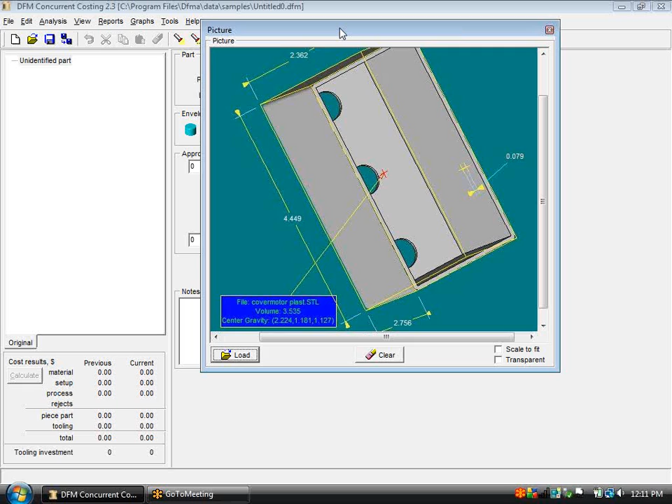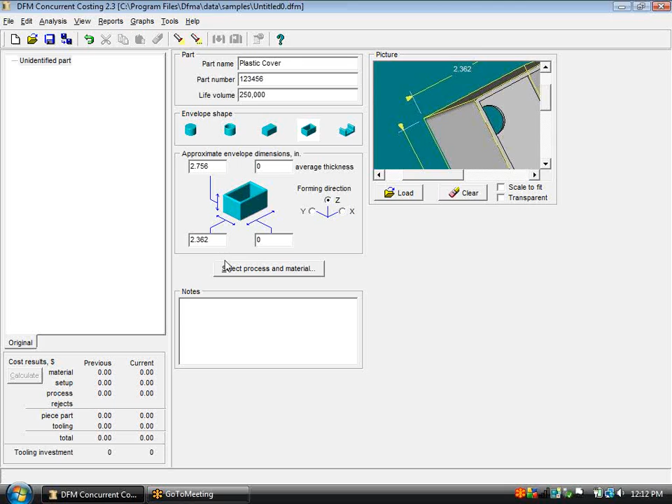So given this as the example here, I would call it the plastic cover. I'd give it a part number, and I can specify a life volume. Maybe we want to mold 250,000 of these parts. Now it's obviously the hollow box shaped part. It's 2.756 inches tall. It is 2.362 inches wide, and it's 4.449 inches long, with a section thickness, a wall thickness on average of 0.079.

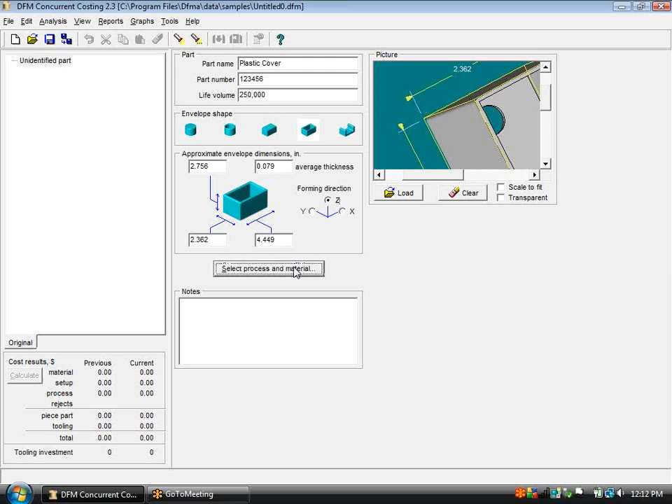Now Z is the appropriate choice for the direction of tool motion. I would open and close the mold in that direction, therefore getting those holes in the bottom of the part, not requiring any side actions on the tool. Now I press this button that says Select a Process and a Material to bring up the Process Material Selection dialog box, where I'm now going to choose the manufacturing process and material.

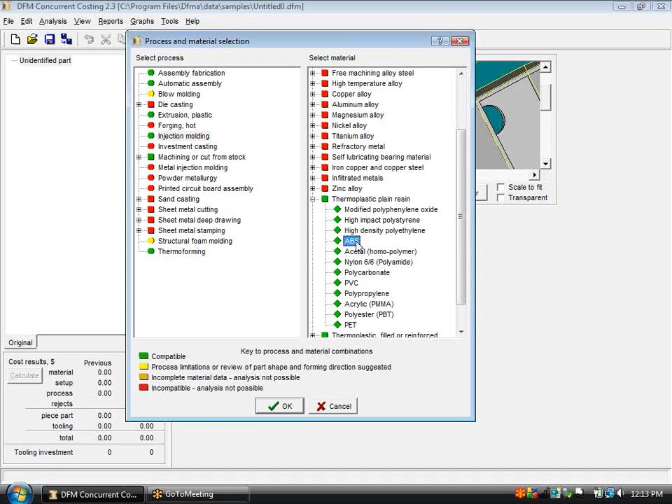So here I'm going to pick injection molding, and you'll see the materials turn red and green to indicate to me which materials are and are not appropriate for the manufacture of this part using this process. So under plain resins here, I'm going to pick ABS as the material I want to use. So when I've selected a process and a material and they're both green, or they're yellow and I'm willing to accept the process limitation that is being described to me, I say OK.

And the software will go ahead and calculate for me a cost, 29 cents at the piece part level, with $33,348 for the tooling. Now that calculation of the cost at this point is based on a guess of what these values are based on the envelope dimensions and the envelope shape that we specified. And it's up to us now to go through and refine these inputs to better calculate what the actual cost of the part would be. Now I can change anything I want, and I can click Calculate to see the impact of that.

So right away, let's change the batch size here to 12,000 pieces. The default batch size is set to 1/8 of the life volume, so that's where that number came from. If I change that, it colors the field blue, and when I click Calculate, I can see that that really had no influence in cost at 2 decimal places of precision. It actually took my setup cost from something less than a penny up to a penny as a result of that change. I could change the plant efficiency, the regrind, the scrap value, any of those values.

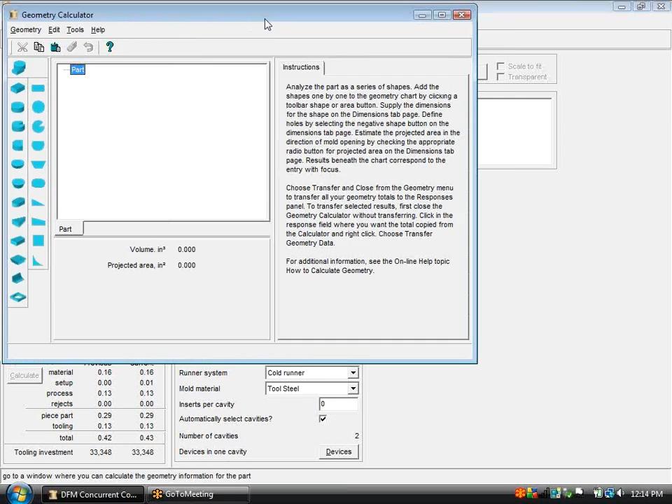And then I get to these geometry inputs. Now, if I know them, I can type them in. So if I know this part weighs 0.15 pounds, I could type that in there. If I had, again, imported the CAD model, these values would have been extracted from the model for me. Or in this case, I'm going to show you how to use the geometry calculator to go about building up the geometry of that part. Well, we're starting fresh here.

The envelope dimensions that we entered at the top level are not assumed to be the default when we start. So I got to start with a block, and I want to pick this yellow box here and tell it it's got a 0.079 wall. It was 2.756 tall, it was 2.362 wide, and it was 4.449 long.

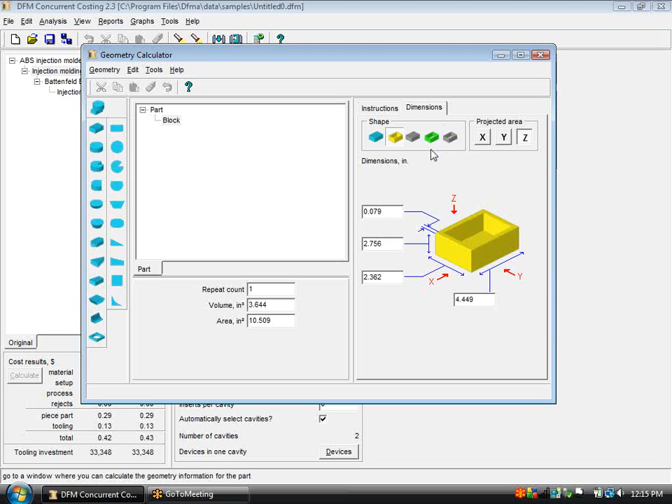The projected area direction is in the Z direction here, so that's going to be influential in the calculation of the machine size. And then to get the volume correct, I had those 3 holes in the bottom, so I'm going to pick a cylinder here, tell it that it's negative, it's 0.079, and those holes are about a ½ inch in diameter. Again, the projected area is in the Z direction, which is going to subtract from the amount of press force that's required. And there are 3 of those that are in the bottom of the part.

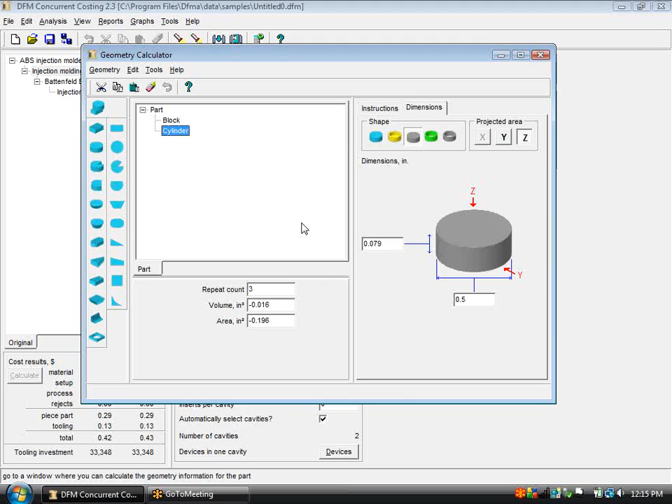Now if I pick the part level here, you can see the volume and projected area that the software has calculated. And if my shape was more complex, I would use these other shape classes here to build up the volume and projected area of the piece I was looking at. I then go to the geometry menu, I select Transfer and Close, and that will color those fields in blue for me to let me know that those have now come from the geometry calculator. I can click calculate. I can see the impact on the cost is still negligible at 2 places, so the guess that the software had made in this case was a pretty good one initially.

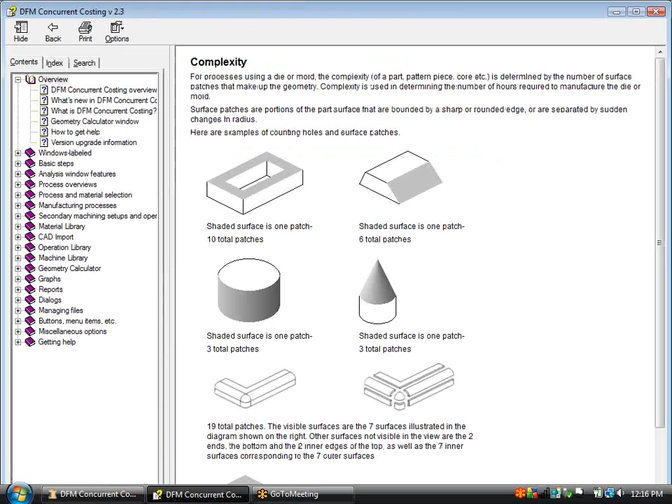Finally, this value of surface patches needs to be edited. And if I click in the field and bring up the help system, and I click this link to complexity, you can see here some descriptions of surface patches. Surface patches are a count of the surfaces on the part, and they're used to estimate the tooling cost. So we see here this shape, it's saying has 6 surfaces, 1 here, 2, 3, 4 on the bottom, 5, 6 on the back side.

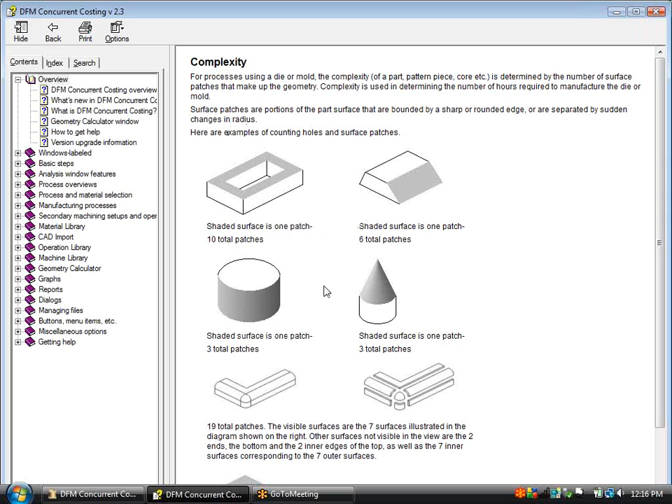So if I go around and I count up the surfaces on my box, it actually looks an awful lot like this one. So we start out with 10, but then the inside of each of those holes would count as 1. So I'd have 3 more, or 13 surfaces on this box. So I'm going to change this value to 13, and we're going to see a fairly significant impact on the cost of tooling. We've gone to $12,500 now, but the software also has this algorithm that automatically selects the optimal number of cavities, and that value is now changed to 4.

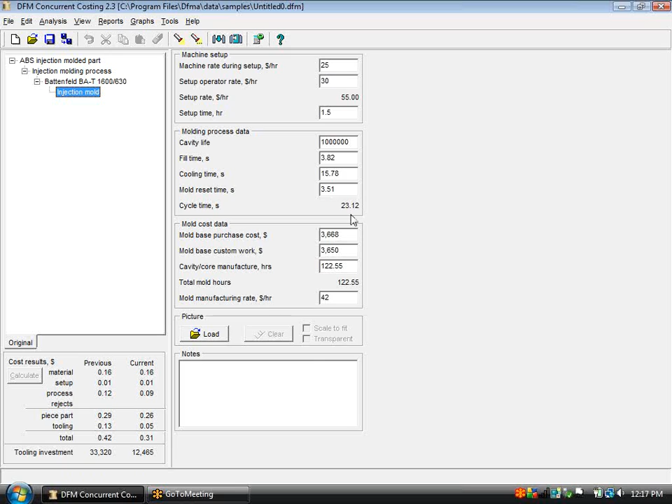Based on 4 cavities, the software has selected this machine that is the least expensive machine that's capable of molding this part. And then it's down here at the bottom level showing us the calculation of the cycle time. So that cycle time is the cycle time to mold this part based on the section thickness of ABS that we've specified. That time multiplied by this rate for the machine is translating into this process cost. And then up here at this level, that part weight at that material cost with that regrind and that scrap value are resulting in this material cost contribution to the 26-cent piece part cost here.

Now again, I could continue to refine this by changing the material costs, the machine rates. I could right-click on the machine and change the machine. If I've added machines to my library, I could select different suppliers and see what the costs would be at different supplier regions. But at this point, once I've gone through and verified all those inputs, changed the values to the ones that I want to be appropriate, I would have a representative manufacturing cost here for injection molding this part from ABS.